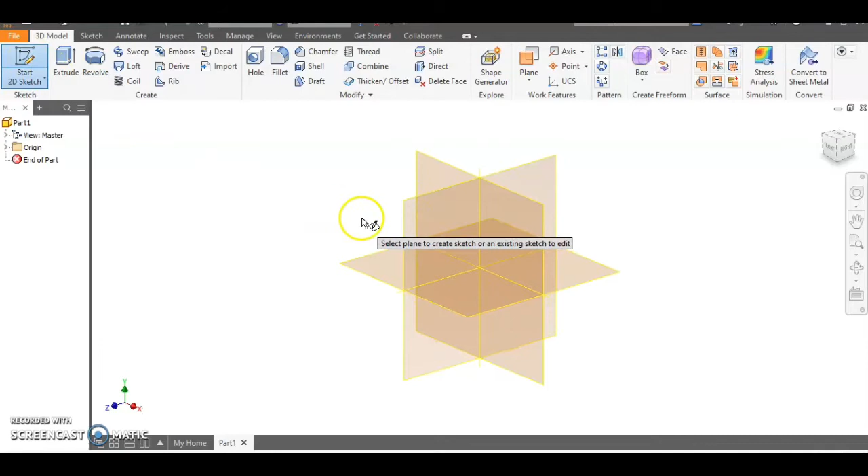To begin with, we're going to select the pencil in the top left hand corner, and we then want to select one of the vertical work planes like so. Now we're going to use the Revolve feature to begin with, so I'm going to zoom out and work in this space just in the top left.

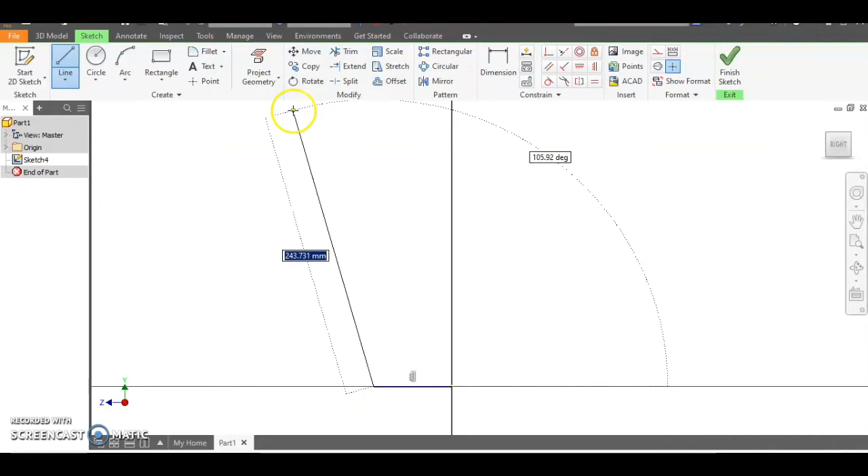For the Revolve feature, I need to select the pencil tool, or the line tool, and I'm going to draw half the shape. So I'm going to start by drawing a horizontal line along the bottom, and then a sloped edge, which would be the side of the cup. Again, you might need to zoom out to get the proportions you need. I'm then going to draw a horizontal line along the top. You might need to zoom in for this. There we go. And then a parallel line down this edge here.

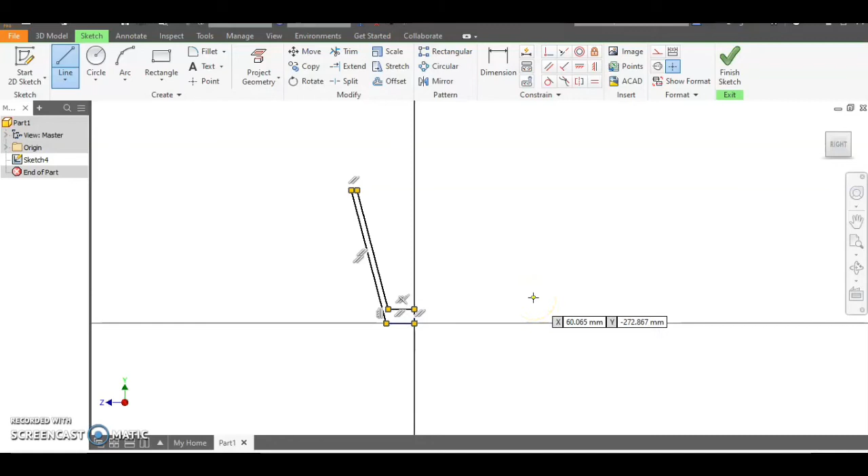Now when you see the two lines appear, that means the lines are parallel. And I want to draw lines round to make a closed outline shape. It's really important the shapes are closed in outline. And as you can see there, I've got my parallel line down the side. Once I'm done, I can hit the green finish sketch tick. Hit the zoom all button, and you can see the profile shape there.

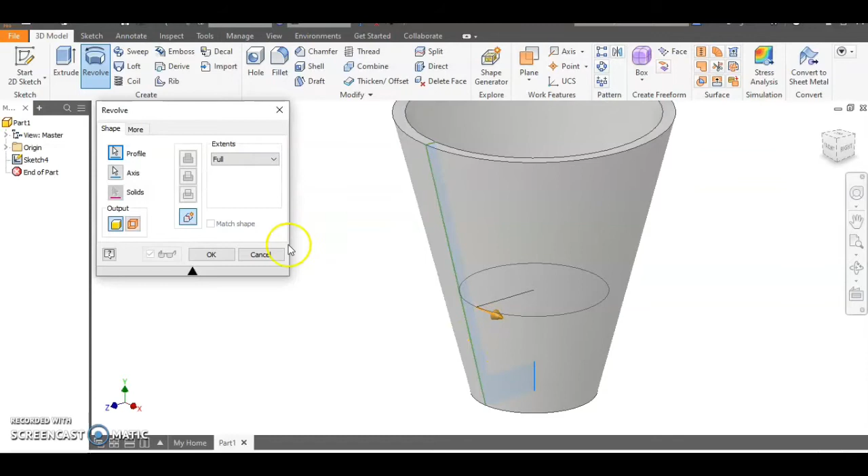Now we're going to use the Revolve tool, so it automatically picks up the profile, and I then need to select the center axis. So I'm going to click that line just there. What happens, it takes the shape and spins it around 360 degrees around that center line and creates a shape a bit like this. There we go. Now on these cups, you usually have a wider base for stability.

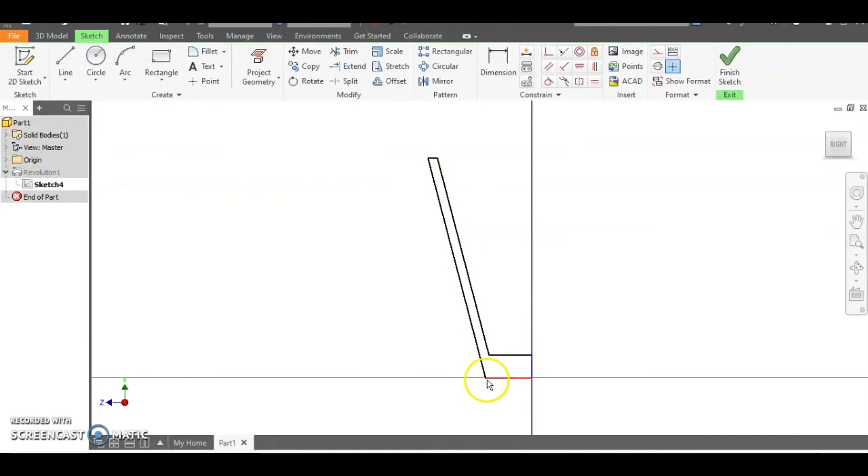So we're going to go back across to the model tree and select our sketch. We right click on it and edit sketch. We can go back and edit our sketch to make a wider base. What I'm going to do is draw a triangle shape along the bottom, just like that, to make the base.

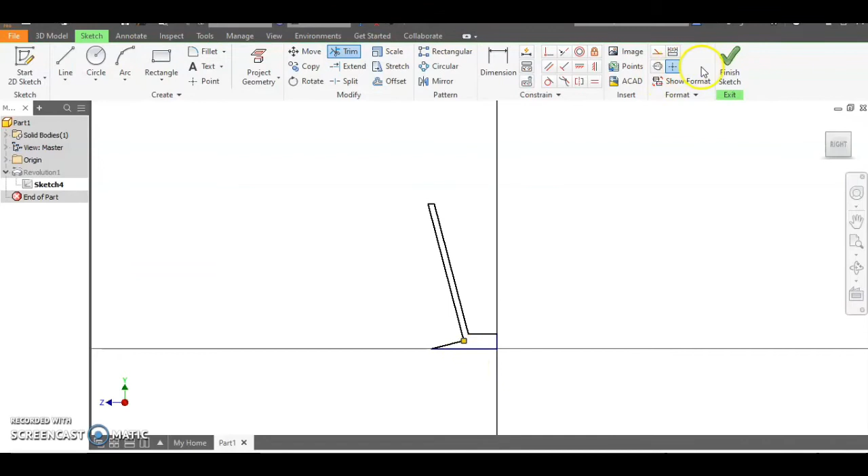Now this shape won't work, the feature won't work because I don't have an outline shape, so I need to select the trim tool and remove this line just here. And there we go, so I've got a nice outline shape now. If I hit the green tick to update it, you'll see I've now got a base on the bottom of my cup.

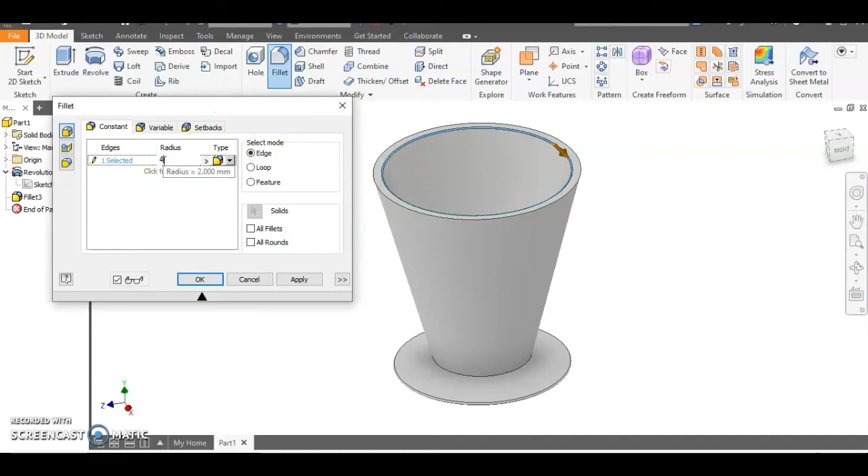Like in the second model, we now want to fillet some edges to make it look a bit nicer. So let's fillet the base part first of all. And because I haven't done this to size, I'm going to have to have a little play with some of these sizes. Let's radius it to, I think that looks pretty good. And let's do the top edge as well, so it's a bit nicer to drink from. Again, let's try maybe 4mm on that one. Yeah, that's pretty good as well. Yeah, I like that. There we go.

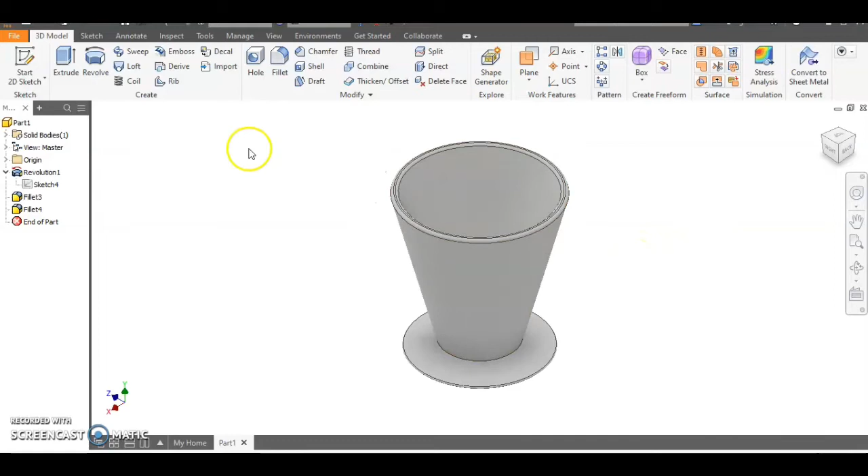Okay, so next step is to do the handle, and we're going to do the handle the same as we did in the coffee mug. So what we need to do first is choose a bit of paper that's going through the centre of the model. So we'll click on Origin, find one of the work planes, I'll select that one, click the pencil to draw on it, and I can then draw the handle in place. I'm going to draw it near the bottom end here. Again, like the first model, the second model should have the same.

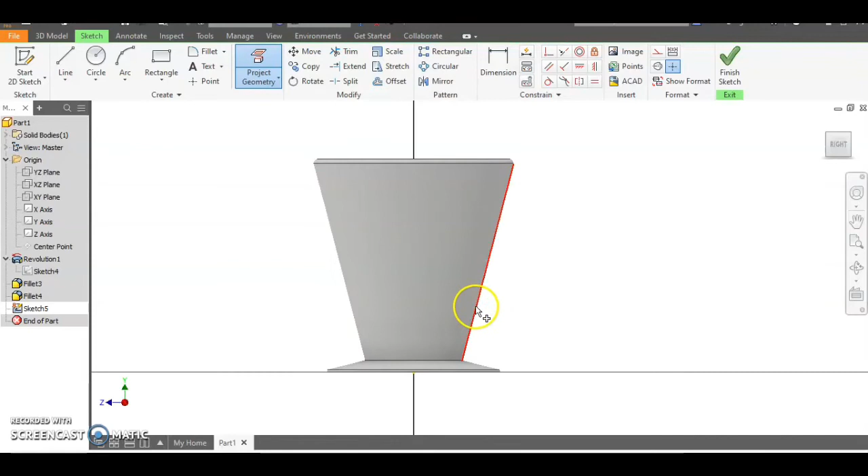I'm going to select Project Geometry to give us a helpful line, and then using the arc tool, I can draw the curve in place, and it's going to snap to this line. I just draw it so it looks the right proportion. Hit the green tick. You can see I've kind of penciled in where the handle's going to go. We're going to use the sweep feature once more.

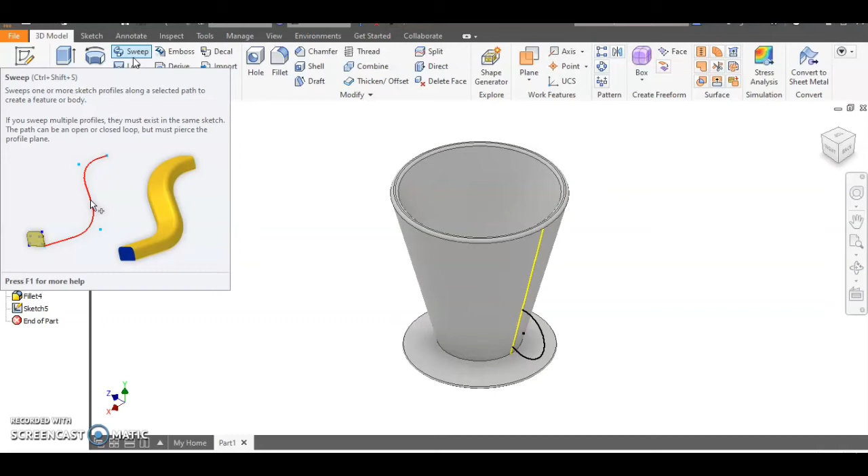Again, the sweep feature, just to remind you, we need a 2D profile shape, and we need to have a line, which is a path, to draw along. So we've got a path. Let's draw the profile shape. I'm going to put a new bit of paper on a new work plane. Just use tangent to an edge. Click that line twice to position the paper, and I can then draw on that bit of paper the shape I'm needing. Again, I'm going to turn it.

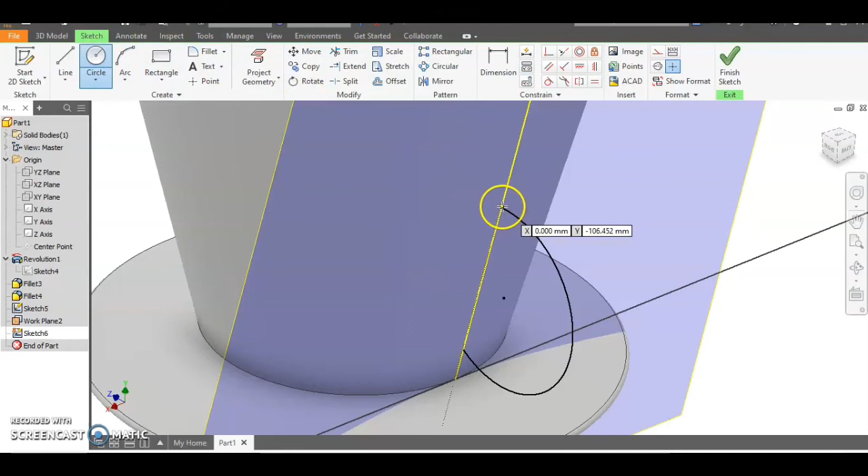We want to make sure the shape we're going to draw, it's a circle once more, is going to be at the very end of the line. And just draw a circle that looks the right proportion. There we go. So we've now got the two things we need for the sweep. We've got our profile, that's a shape, and our path, the line. There we go. So I can select the profile, I can select the path, and the circle's dragged along the line to form the handle shape.

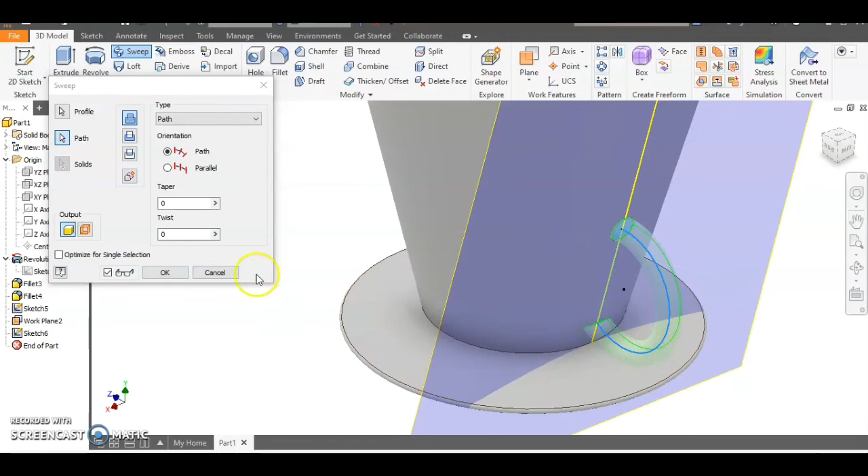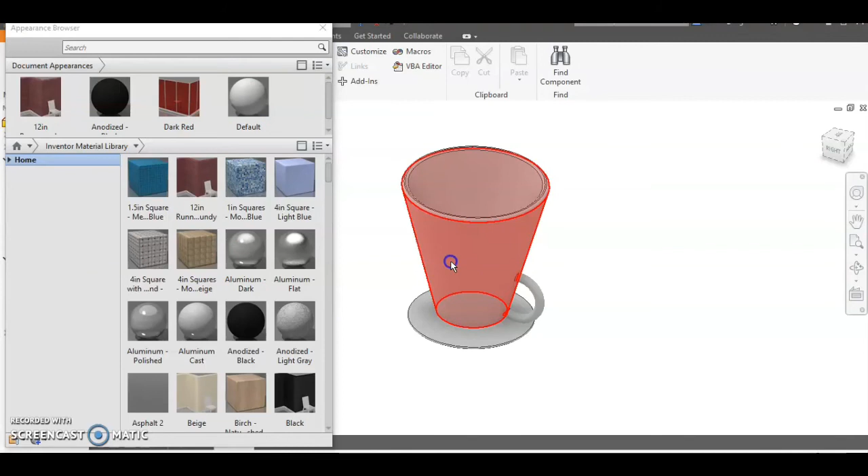Like in the second model, we want to remove this work plane, so we can right click on it, click on visibility, and it looks so much better. There we go, we've got one latte cup made. Let's add some colour. So again, we're going to click on Tools and Appearance. We can then select the surfaces we want to colour. There we go. Let's make these red. So right click and go Assign to Selection.

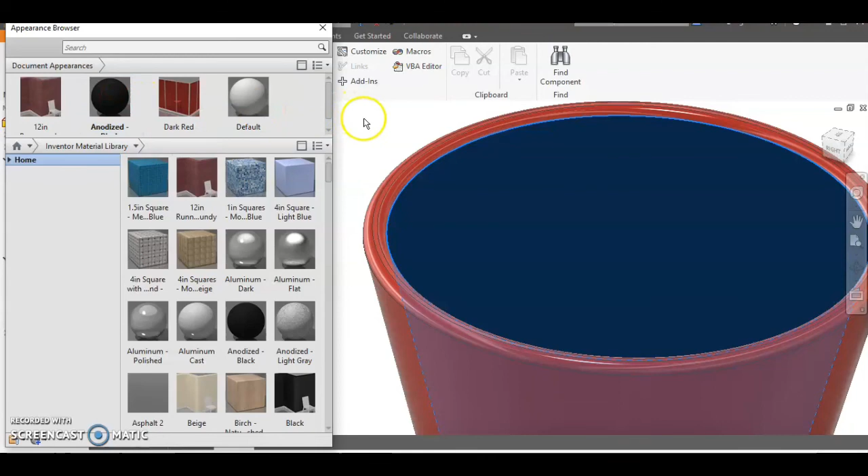Need to zoom in a bit for this though. Oh wait, top edges as well, so let's select these edges as well. Make them red. Let's make it black inside. And maybe the handle black as well. And there we go. A latte cup.